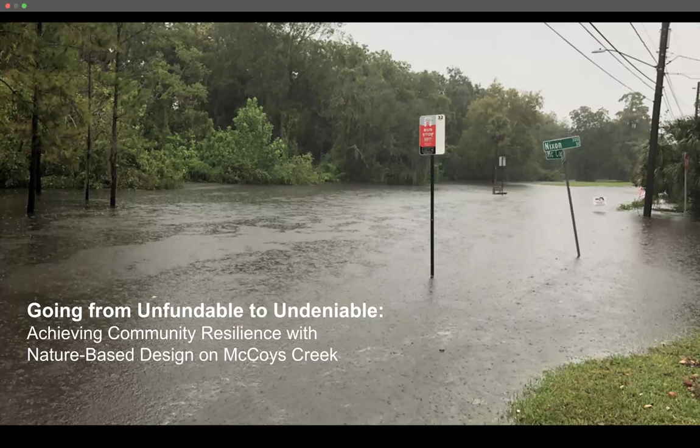So thank you, that's the first part. Thank you so much for offering us this opportunity to speak about this project that is very important to the city of Jacksonville. And so glad you ran into John and got a chance to pick his brain and talk about it. So next slide.

First thing I'll do is give you a little orientation for those who aren't that familiar. We're in Jacksonville, Florida, in the northeast portion of the state. We're bisected by the St. Johns River, and we have many other rivers, creeks, streams and water bodies. One of them is McCoy's Creek, which lies just west of downtown, going through some highly developed areas.

It's residential mostly on the upstream end, and then it gets more into a commercial and urban feel as it goes through, just west of downtown, and outfalls into the St. Johns River. What had happened to the creek was decades of development and pollution, and man-made forces that channelized it. The efforts to restore that creek is what we're going to highlight and talk to you about today. So, next one.

Just briefly, so you know where we're going: I'll give you a little project background, talk about what we did for community engagement efforts, go into the challenges and our design priorities. John and Chris are going to speak about funding and the details of the design, and then I'll come back at the end, if we have time, and give you a status update on where we are in construction. Next one.

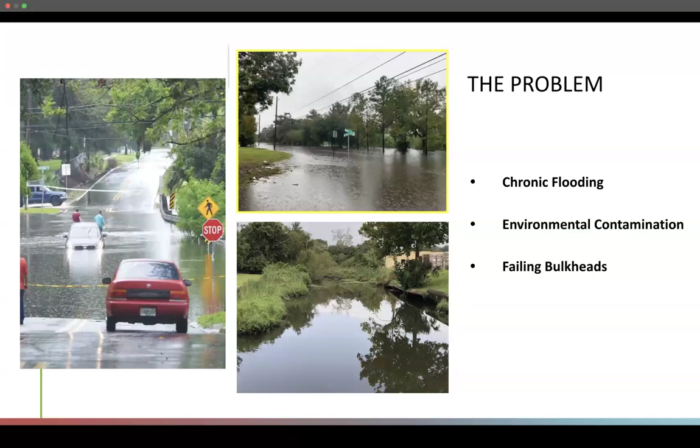So generally, if you get a bunch of engineers together and say we've got a flooding problem, they're going to come up with solutions that are kind of the build-a-bigger-ditch approach. We might say we need more stormwater ponds, increase the pipe size, build higher bulkheads. Those are kind of the direction we normally go.

Instead of that, the city decided to try a different approach and find out what the community really wanted, or how we could get a different solution for this flooding problem.

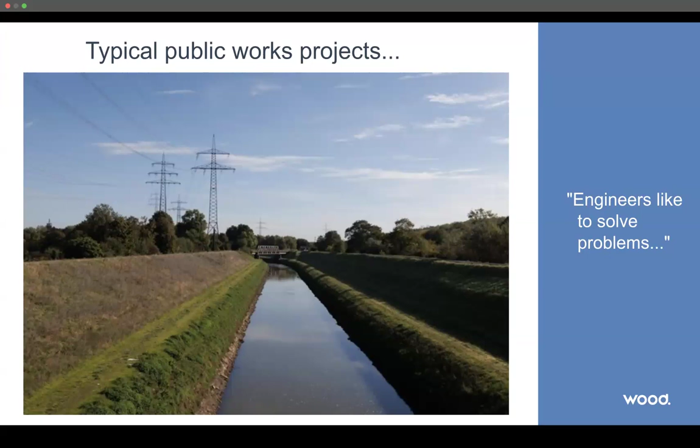So what Groundwork Jacksonville came up with was this concept for a nature-based solution. And not only that, they also proposed this idea for a linear park system, to turn the banks of the creek into an amenity with exercise equipment, park benches, and whatever the community might want—turning it into a real gathering place.

This concept, which the city has embraced and is now implementing, is called the Emerald Trail.

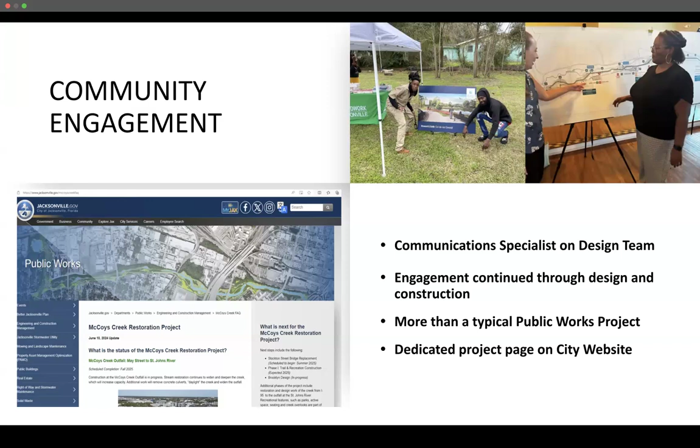I won't go too much into the challenges because John is going to cover some of that, but just know that since this is in a highly developed area, we have lots of infrastructure in terms of water and sewer going back and forth across the creek. We have to go under a major interstate, and we have to navigate under a CSX elevated rail bridge.

So that's a challenge, as well as that community involvement we talked about. It's a great asset, but it's also a challenge to manage that many voices and that many opinions.

So that's kind of a short look at what we're dealing with as far as some of our challenges.

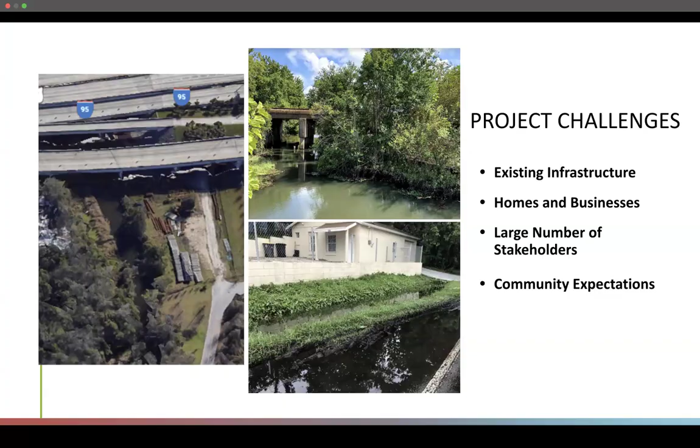Next slide. So we took all of that, everything we heard from the community, everything Groundwork Jacksonville presented to us as this concept, and we narrowed down our priorities, our design priorities. First and foremost, we have to reduce that flooding. We've got to get that under control.

In doing that, we also wanted a resilient project. We wanted to make sure we kept the stakeholders engaged throughout this entire process. And at the end, we wanted more than just a bigger ditch—we wanted a community asset.

So we took those priorities and handed them to our designer, John Kiefer, and said, 'Hey, what are you going to do for us? What can you design?' And at this point, I'm going to let John tell you about that.

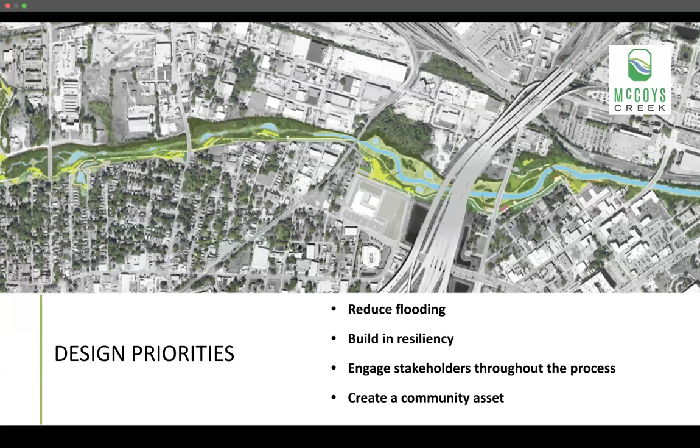So, John, I think that's you now. Okay, I'm ready. Next slide, please. Good afternoon, everybody. So I'm in a really wonderful position for this project, because my team and I were hired for scientific and technical support to help with the visioning with Groundwork Jacksonville.

Groundwork Jacksonville hired us to help them get into the community, determine what the community vision was like, help them attract funding and win grants, and help them win hearts and minds with the city of Jacksonville for this approach, because this was novel for the city.

And then, as Nikita mentioned, the city kept continuity with our design team, and we became consultants to the city, carrying the stream restoration components of this project through everything, even through some strategic construction guidance and matters related to implementation. So this project is super near and dear to my heart.

Now, we knew going in that it was ambitious and novel, with complex challenges that needed to be overcome strategically and systematically. That starts with sustaining a vision. And the vision is driven by building consensus regarding community needs, making sure there's a good common understanding of the trade-offs of different alternatives, and then arriving at an overall solution set that the community sees as a net gain.

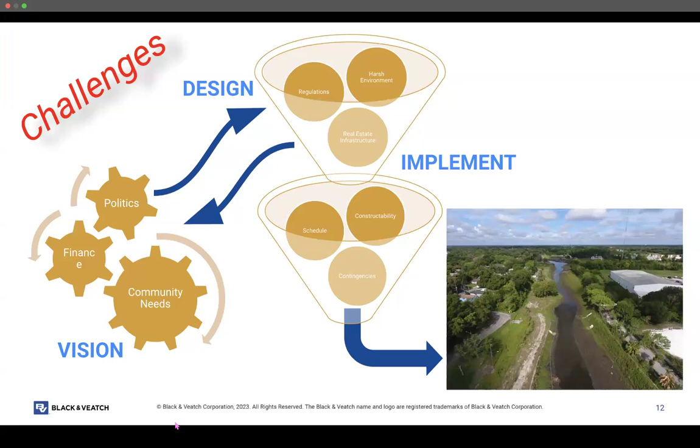The third one is build momentum and then time your advances wisely. Some of the challenges cannot be eliminated right off the bat.

The almost final point is you have to have people on your design team who are great teachers, and the whole team has to have insatiable curiosity. Otherwise, you're not going to properly capture what is necessary in the design to deliver what the community really wants and needs. So share your joy—it's self-evident, but it's a long slog, and you need to balance the times you feel defeated with sharing the times when you feel enthralled.

And this was overall an enthralling project. There's going to be times you feel obstructed. Then roll up your sleeves and refer back to the first touchstone, and make sure we're working diligently for that compelling solution, and then you'll find the joy again. That's basically how we like to operate. We set that up very intentionally, and that carries through the whole process.

I'm going to speak a little toward the actual physical challenges of the site, a combination of social, political, as well as biophysical issues. So what do we mean by restoration? We have this great map from 1864 of what McCoy's Creek looked like pre-development. That's not what we mean—we can't go back to that.

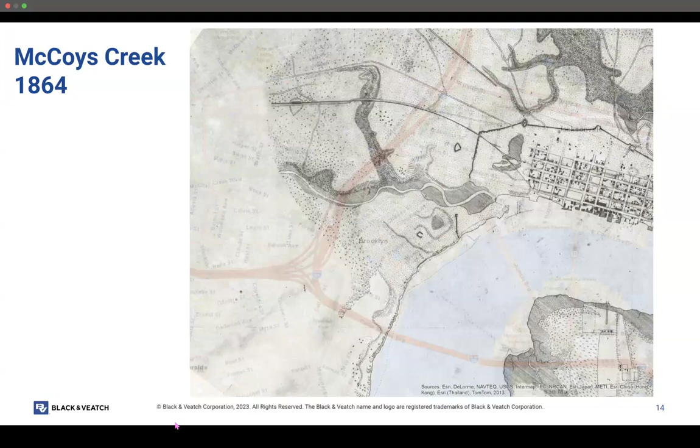The original creek and its wetlands were filled and turned into an industrial rail complex. The creek was replaced by a drainage canal, south of the original one, and was gradually filled in by sediment and municipal waste ash. That incinerator, by the way, was put right into the middle of the neighborhood next to a school—it's mind-boggling sometimes. Needless to say, the system doesn't perform flood functions very well after that history.

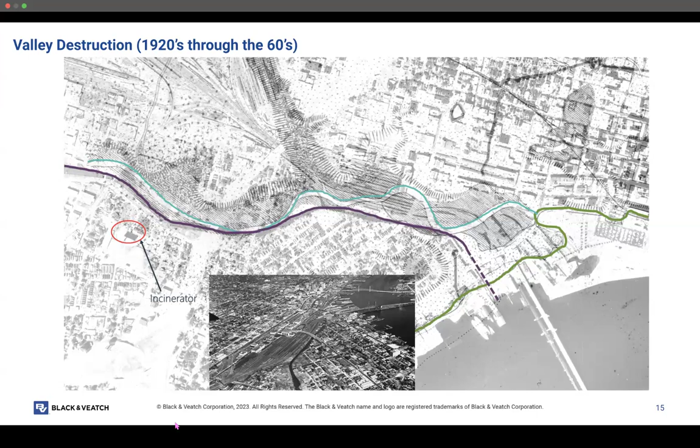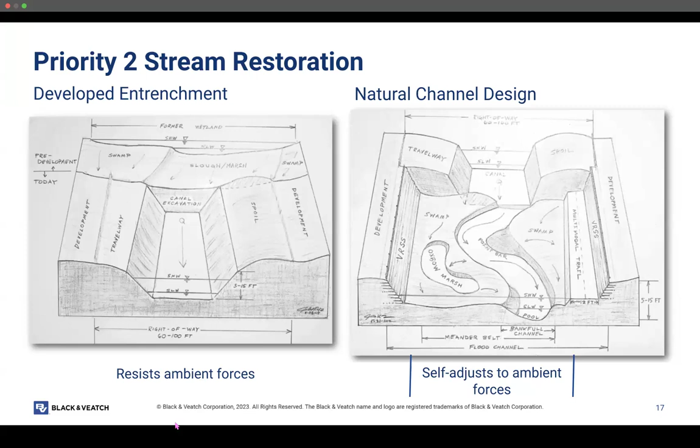Above and beyond that, we're also enlarging a flood channel that gives floodwaters greater volume to occupy at lower elevation than the adjacent neighborhoods and streets—we call that the floodscape. So these are the components we're designing, harnessing natural gradients so that the pattern and dimension of these components vary along gradients, picking up additional flow and sediment. In this project, it also matters how far we are into the tide, because this goes from freshwater to tide over about a 3-mile stretch of restoration.

The result here was that there are 7 different stream types that we had to create to have biophysical integrity of the system. 5 of those are fully natural—when they're all said and done, you will look at them and not know they're not natural Florida. 2 of those are novel ecosystems, and we'll touch on one of those a little later, but they're for the most part patterned after natural sites, and that's what we mean by restoration.

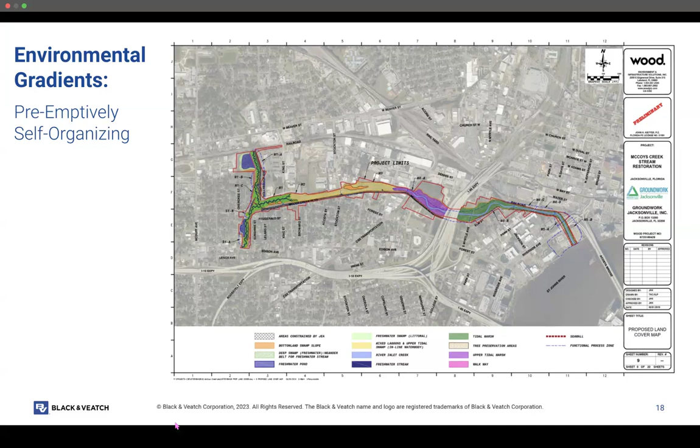We had to future-proof the projects against the effects of climate change. This project had a big sea level rise component, but it's also, I think, more applicable to your region—we had to future-proof this against storm intensification. We're getting bigger amounts of rain on more frequent occurrences, and that's causing flooding issues by itself.

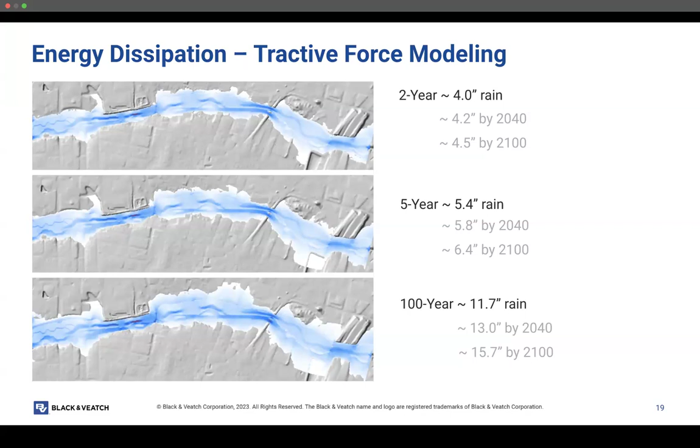So we want to extend the longevity of this investment by making the floodscape larger than it needs to be today. That's an investment to assure the benefits will cross multiple generations. We numerically model these design outcomes to support risk-based asset management decisions to achieve that longevity.

Recognizing that this is a multi-generational investment, we want to continuously seek to create a community amenity, so that the net benefits are self-evident and embraceable to community leaders who are thinking not just of themselves but their children and grandchildren and beyond. The community often talked about their grandchildren in our public meetings.

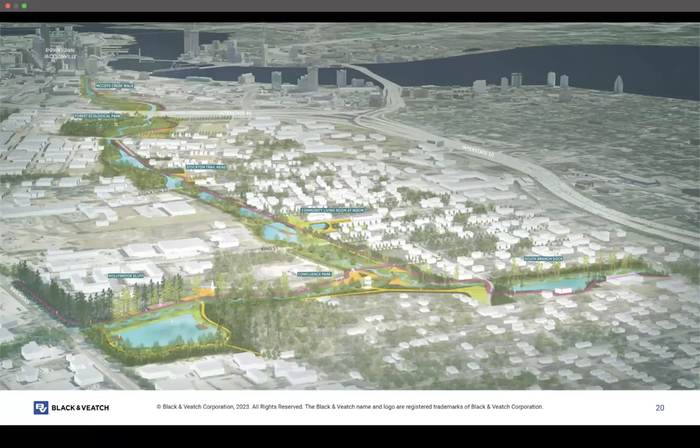So landscape architects can excel in helping with this role. Our partner here was Scape Studio, and they did a really nice job listening to the community and working with Kay and our design team and the city to find ways to make nature accessible to the community, because the community was very clear that was something they wanted.

Several of those commitments are being expressed here during construction, including pocket parks with varied habitats approachable to visitors, including a fishing pond, and greenway trail alignments. We went to great lengths to preserve the best remaining forests in the area, and there will be boardwalks, lawns for picnicking, benches, and lighting—all just in this scene alone, distributed throughout the project.

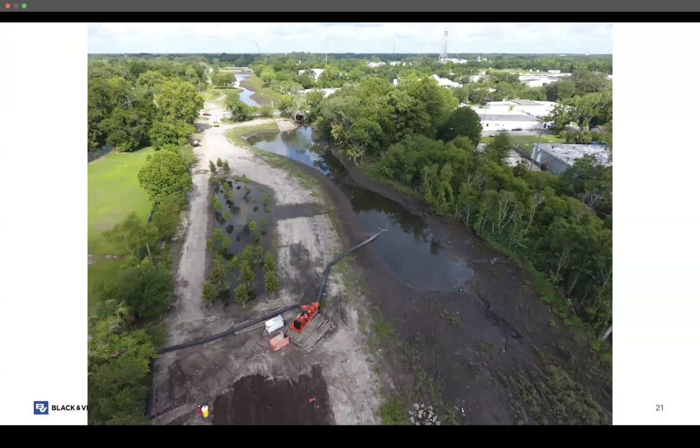It's important to be adaptable continuously—be flexible with your design and inflexible with the facts. Here's a good example of the flexible part.

One of the community task force members, a gentleman named Henry Scott, made a late-breaking request to preserve this tree, which we now call Henry's Tree. It was in the way of where we wished to establish that excavated floodscape I talked about.

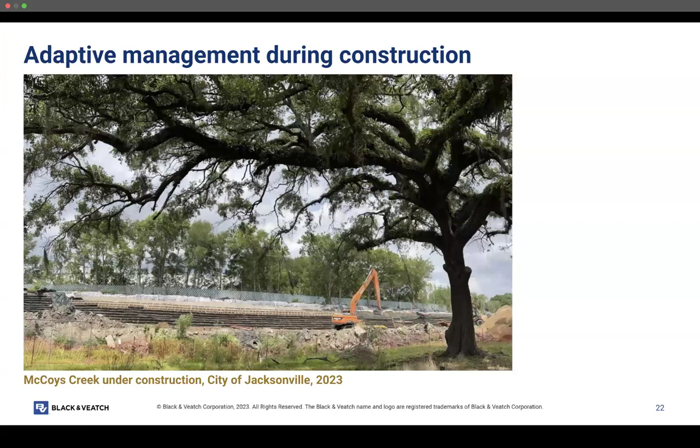From a strictly technological standpoint, it would have been easy to say no to Henry, because the design had already been approved without that tree, and was out for bid for construction at the time of the request, if I remember.

But it wasn't easy to say no to Henry, because I'd gotten to know him very well over a couple-year period. Henry told me that his mom birdwatched from that tree at her home, and that it was the screensaver picture on his computer. He was speaking not just personally, but for the community as a whole.

We fortunately had designed the project with some hydraulic headroom, and we could contract the channel a bit there to conserve the tree, and did so. While at it, I worked closely with the construction contractor, Kiewit, to extend the opposite bluff, narrowing the creek just a little as well, to avoid the tree line above it, making sure those trees would be present as a visual buffer for the community and from an adjacent industrial facility.

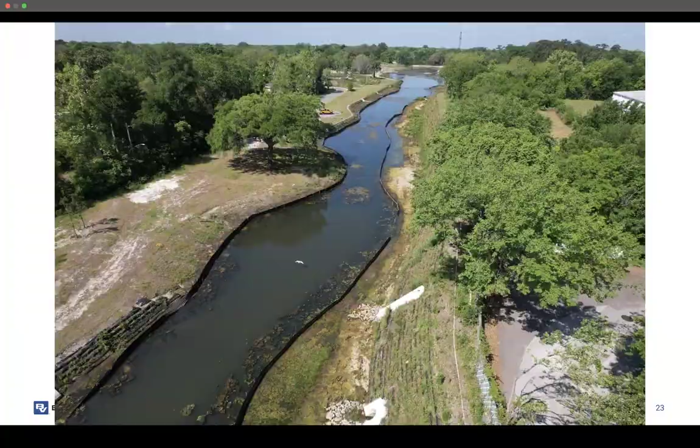The key lesson here is to think ahead and make sure that you have some space to accommodate late-breaking requests.

I mentioned timing, biding your time and finding the right time to pursue negotiations. Probably the most challenging part of the design domain from an asset conflict resolution standpoint was where the buried creek needed to be daylighted under 3 Florida Department of Transportation highway off-ramps. The city bided their time until they had the leverage, political support, and capital needed to push this solution forward. If they had tried to force this resolution and negotiate too early in project conceptualization, it probably would have collapsed, and might have killed some of the otherwise achievable flood and environmental benefits, because we're doing about 3 miles of stream restoration upstream.

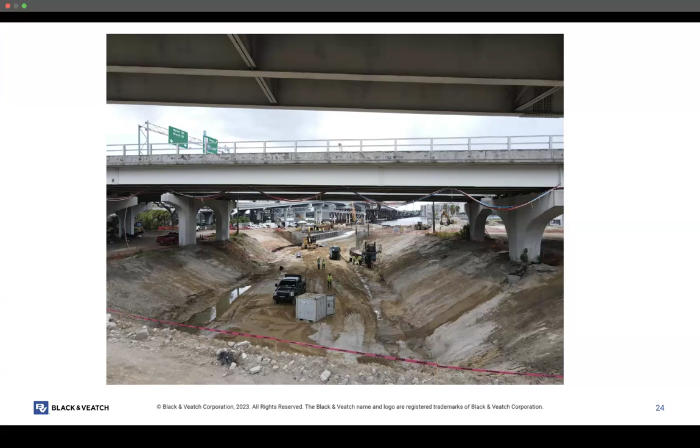Part of building that political capital came from earlier in the project with former city council Councilman Lori Boyer. Councilman Boyer was a project visionary who was responsible for landing the state funding for the project, which was a lot of the funding for the project.

Her particular vision, however, was to turn McCoy's Creek into something more like the San Antonio Riverwalk. If you're not familiar with that, it's a very intensively managed, partial flow diversion of the San Antonio River that looks like Disneyland. It's a great place to visit, but the biophysical conditions and flood pulses that come down McCoy's Creek, and the purposes of this project, were not compatible with that kind of vision.

So somebody had to break that news to Councilman Boyer, and that's where the value of having a non-government organizational partner as part of the project leadership team can be really beneficial. Kay at Groundwork Jacksonville was able to facilitate some very blunt conversations with Councilman Boyer that would have been much more difficult for a city employee to have held.

After several such meetings with Kay and I, Ms. Boyer came around, and we worked out that maybe 2 of the 7 design segments could be developed directly for the economic stimulus she desired. It just worked out really well. That was timing that was required to be done early, because Lori's support was essential to building the political capital necessary that came in later in the project when dealing with other challenges.

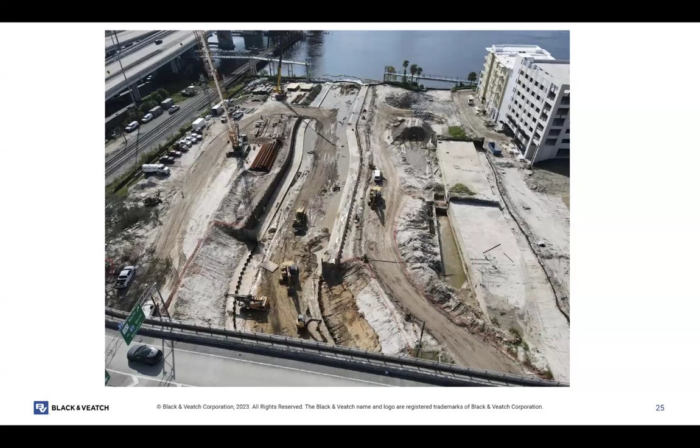Mutual gains negotiations came into play for solving distributional disputes over real estate. There was some land the city needed that was privately held. What marshaled those negotiations were the flood benefits and water quality treatment aspects of a restored McCoy's Creek, which relieved developers from some of their on-site stormwater system requirements. That allowed them to more fully express their developments at their core, freeing up their property on the margins for the city to gain access and do the earthwork necessary to pull this project off. So it's definitely a win-win situation, and the project design sort of drove that merit and those conditions forward.

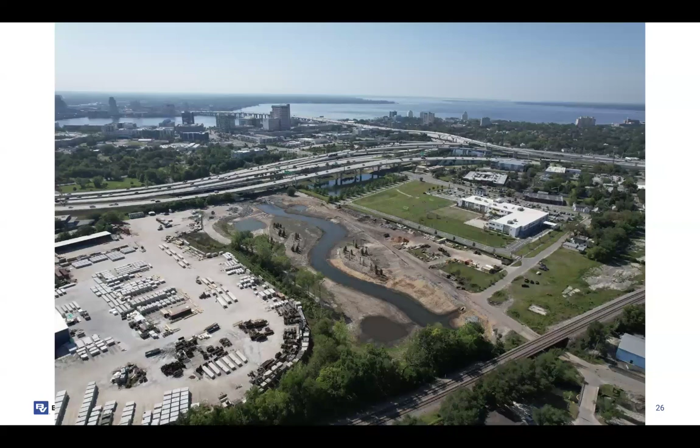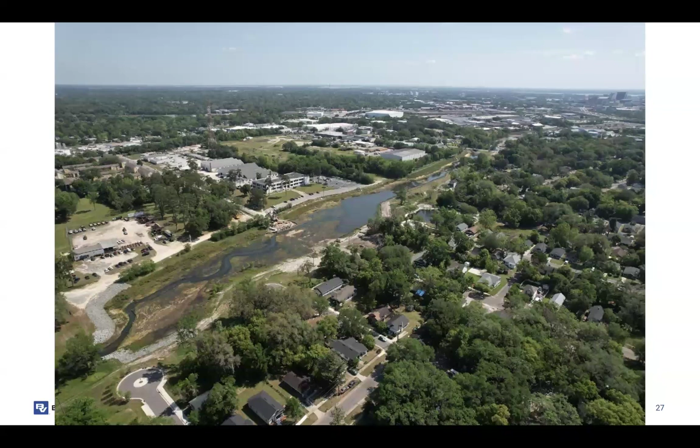The project is packed with environmental values throughout. First, that's what the community wanted. When we're building these new wetlands, streams, and fish habitat in ways that provide flood resiliency and water quality improvements, this also ties to external mission interests from multiple granting agencies. Whether in the freshwater portion we're showing here, or next into the tidal zone of the project, we had ample opportunities to create geodiversity that begets biodiversity, operating at a nexus of creating immense societal value.

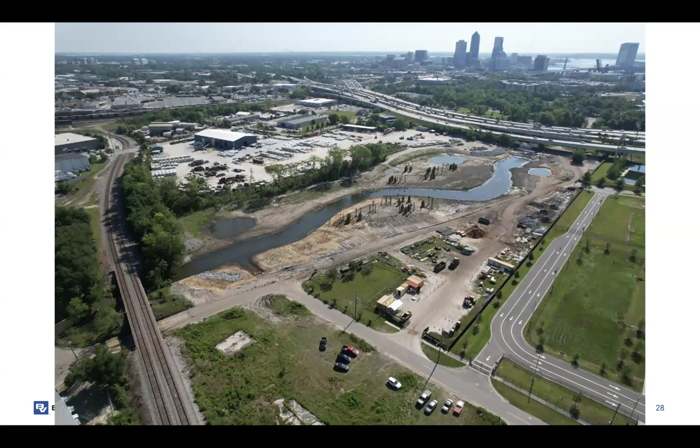Based on environmental quality, most of the benefits I just described are monetizable in a triple bottom line economic assessment. For decades, this project sat unfulfilled when it was offered as the bigger ditch that Nikita mentioned, with a single purpose of flood reduction. It basically required about a $40 million investment to get about $25 million of return in real estate.

Once we started looking at nature-based solutions, that picked up the interest of folks who see return on investment in natural and social capital. That flipped the script. Now a similar $40 million investment, because we added value related to wetland habitats, stream habitats, water quality improvements, fisheries, and recreation, gets at least a $50 million return on that $40 million investment.

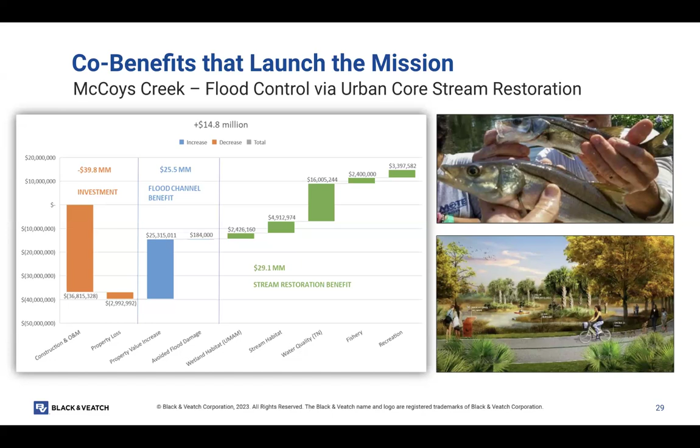It was just easy economics to show. And then the next and final slide before I introduce Chris - it was essentially those co-benefits that financed this project, with each grant program seeing their own nexus of value in the design. What these agencies valued turned what had been for almost 25 years an unfundable flood control project into an inevitable one.

And with that, we can move on to the perspectives of one of the key co-funding agencies, from NOAA, Chris Kaufman. Thanks, everybody. Next slide, please.

So I just wanted to share that I'm from NOAA's Restoration Center, and our mission includes restoring habitat for both fisheries and ecosystem resilience. We work across the country in the Great Lakes and the Northeast, as well as in my region in the Southeast, for over 30 years, working with partners on habitat restoration projects.

Most recently, we've had an unprecedented opportunity through the bipartisan infrastructure law to expand our interest in community resiliency with our habitat restoration projects, which I'll touch on shortly. Next slide, please.

I just very quickly wanted to reiterate that the city of Jacksonville is our major funder, as well as the leader of this public works project need. What happened was we have all of these different entities working in their own spheres of conservation and community improvement. While everyone's working separately in their conservation worlds or community improvement worlds, there often needs to be a catalyst, a champion, or some sort of funding opportunity to integrate and bring these aligned interests together into a single project.

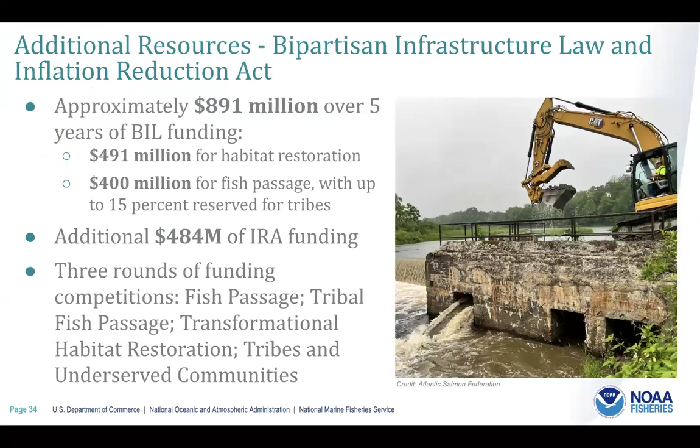Sure, I'll run through just a little bit of these construction photos to kind of give you an idea of what all of that design looks like in practice.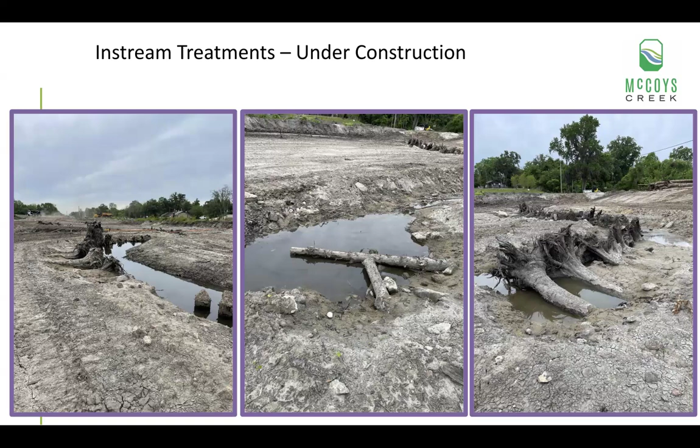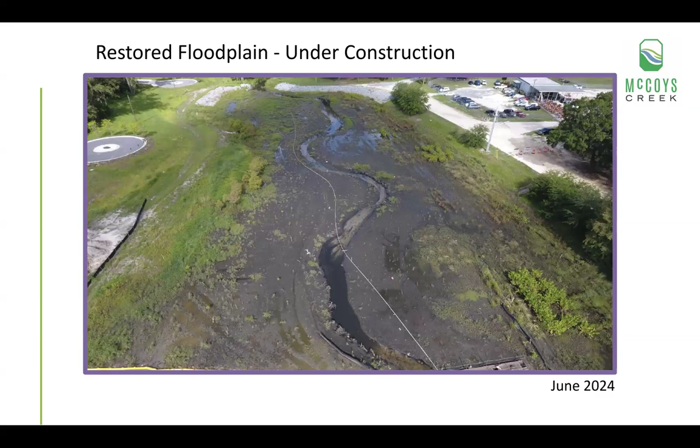This next one is from June of 2024. Now you can see that the old stream is no longer there on the left - we've completely diverted the flow. It's now going through that new stream, the little winding channel on the right, and you can see some of the vegetation is starting to grow in pretty well.

This is a vegetated reinforced soil slope, or VRSS wall, as we call it. John built these into the project at several locations where we had steep banks, a steep slope where we didn't have the space to expand it all the way out and make that more gentle. On the right is the detail from the construction documents, and on the left shows what it looks like while it's being built.

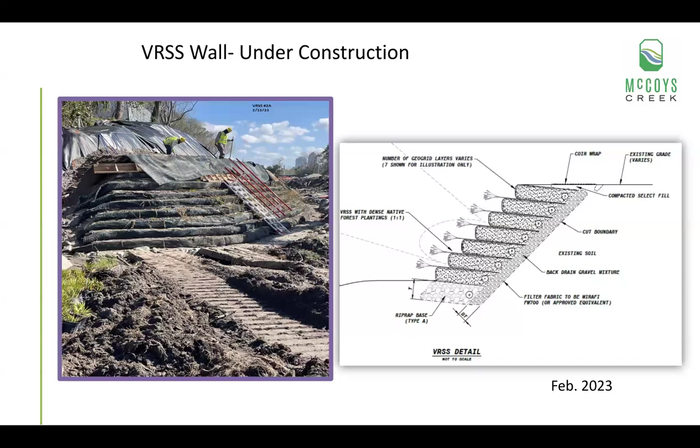The next slide shows what it looks like in June of 2024, so that's probably about a year. You can see that it's so well grown in and covered up. Pretty soon you won't even be able to tell that was a man-made structure there. That has been integrated.

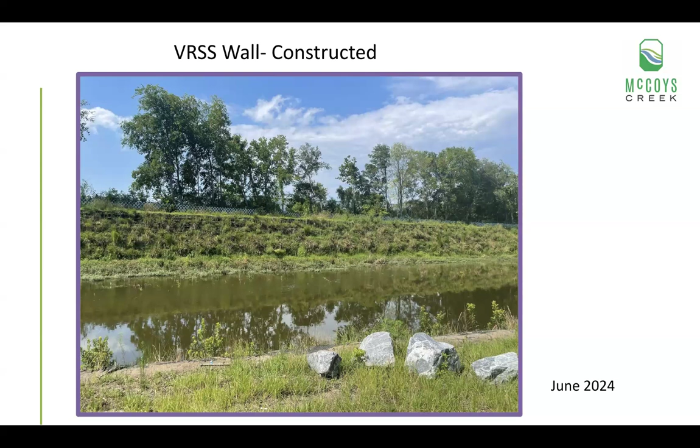That's the largest one on the project, but there are several throughout where, again, we didn't have space to expand and do a more gentle slope. That was just some vegetation that's growing in.

This gets us out to the outfall, where it outfalls into the St. Johns River, where John touched on those two segments that aren't as natural. You can see we're down here almost in downtown, so where the creek naturally goes under that blue arrow is all paved. And where the blue arrow starts, that's where the creek goes into a culvert, so it's completely underground there.

The plan, shown on the right, was to open that up and daylight the creek, which was a key part of one of the grants that Groundwork Jacksonville did for the design of this—to daylight and open up that creek to a more natural solution. That was a big negotiation. We finally got that, and the trade-off, even though we have to do this hardened bulkhead section through this portion, is we're going in with floating wetlands to soften the look, as well as to provide something for fish to nibble on.

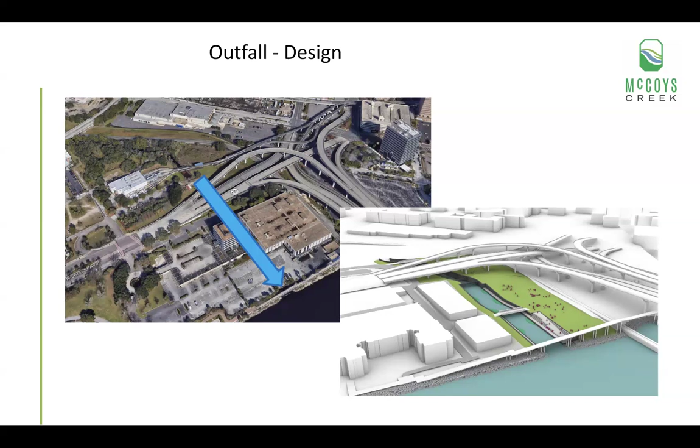So that was it, I think that's it for me.

John, did you want to, if we have any more questions, we'll take them now. Or John, you could go back and talk some more about that wing deflector and the toe wood.

Yeah, probably want to talk a little more about where we daylighted the creek. We invoke a lot of natural channel design principles with the repurposing of the large woody debris from the trees we had to clear, and that creates a lot of the in-stream habitat for fish. It kind of acts like a surrogate for some of the stability that a mature forest gives to that creek channel.